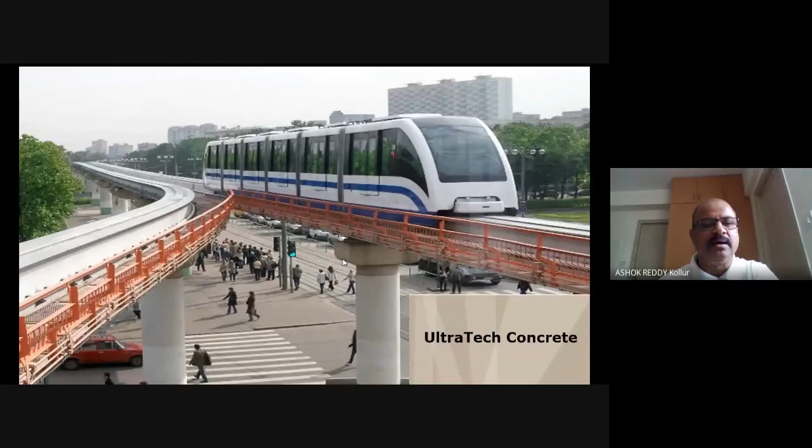For all major metros, railways, and bridges, we are supplying Ultratech cement. We have more than 100 ready mix concrete plants in 35 cities across India. India's first concrete to meet the requirements of Leadership in Energy and Environmental Design and other green building rating systems, as recognized by the Indian Green Building Council. We are the first commercial RMC company in India to adopt concrete recycling technology.

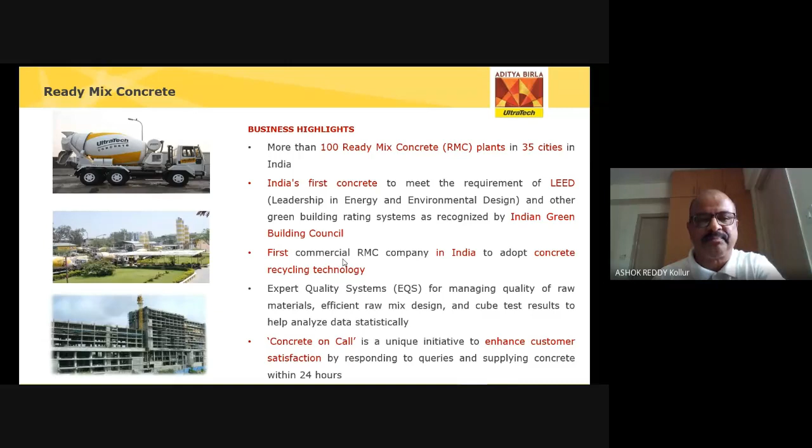We manufacture with expert quality systems, and have Concrete on Call services, with many things available. Our ready-mix concrete brands portfolio includes Ultratech cement, Ultratech concrete, Ultratech staple concretes, free flow concrete, plus concrete, pervious concrete, and fiber concrete. Many types of concrete are produced as per the requirement of the customer.

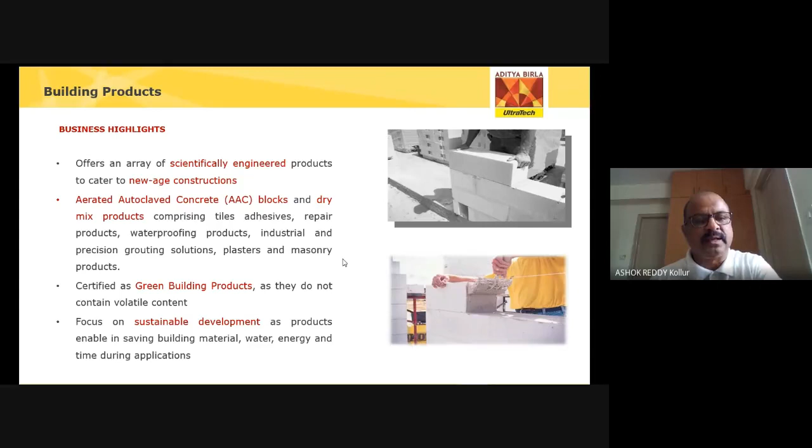Our building product division offers various scientifically engineered products, new age construction materials, lightweight blocks, green building products, and sustainable development products. Under building product division, we have Power Grout for grouting activity, and Super Stucco, which is a putty fixo block material, used to fix the blocks in between, just like mortar.

We have extra light blocks and lightweight blocks, Ready Plast, Seal and Dry for waterproofing solutions, Crack Fill, Base Coat, and Tile Fixo. Many building products are available at Ultratech, all under one roof, called UBS solutions. So any customer or engineer who comes to our stall should get all the items. My sound is clear, right, sir?

Hello. Okay, yes sir, sound is clear sir. Everything is clear, sir. In case if there's any intervention or trouble, I'll inform you sir. Okay fine, sir, fine sir.

So Ultratech Building Solution is a one-stop shop, so any customer or engineer entering our shop should get all the building material. That's what we plan. So any customer enters our shop, whatever from foundation to finish, all materials will be available at our shop. Across India we have more than 2,000 such shops. We are expanding into rural locations also.

This is how exactly the building solution shops look like. We have paints, we have steel, we have waterproofing items, many items. It started in 2013, first large format outlet in Bangalore, and across India we have started these building solution shops.

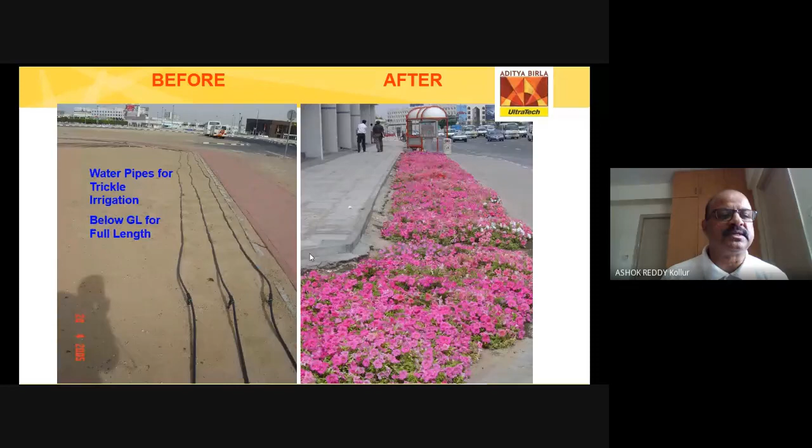It is almost 2,700 feet. How exactly does this look? I have the opportunity to visit this building. It is a marvelous building. We can go up to the 123rd floor. You can see from the 123rd floor, all of Dubai. Buildings look like very small things, and vehicles look like tiny vehicles going on the roads. So how exactly does Dubai look like?

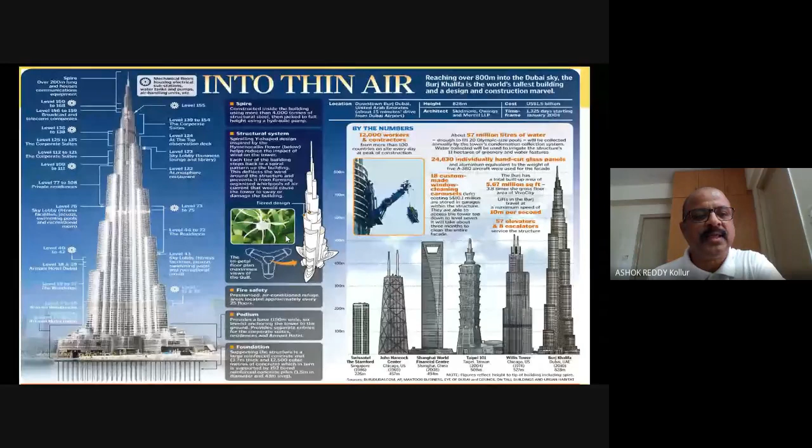Level 73 has very different stages. This building was completed in 2010, opened on 4th January 2010, with 1.5 billion US dollars in expenditure. Height is 828 meters, so 2,717 feet. Just imagine, 163 floors are there.

You can see on the side the other building, which was the topmost earlier, but now it has been crossed. This is what a marvelous building—each one of us has to see this.

The structural system resists the wind. Tall buildings usually have to resist large wind forces. The Y-shaped structure of the Burj Khalifa reduces the wind forces on the building. Y-shaped plans keep the structure simple and help in faster construction. This is what the design they have made.

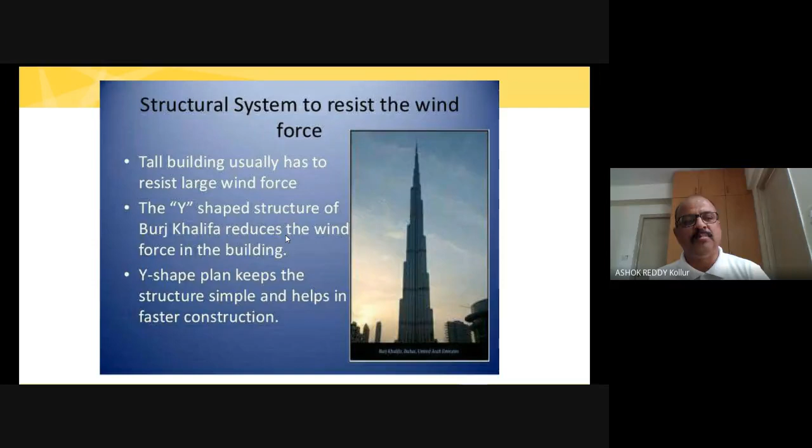So I had the opportunity to visit this building at the 123rd floor. I was able to see the buildings below. Because at that level there is a balcony wherein you can roam and see how exactly Dubai looks, up to 90 kilometers you can see from this place. Very wonderful experience when you go to that level.

Friends, why is this known as Burj Khalifa? It is named after Sheikh Khalifa bin Zayed Al Nahyan, the president of the United Arab Emirates and the ruler of the neighboring Emirate of Abu Dhabi. Earlier, initially when it started, they called it by another name—Burj Dubai. Now they call it Burj Khalifa.

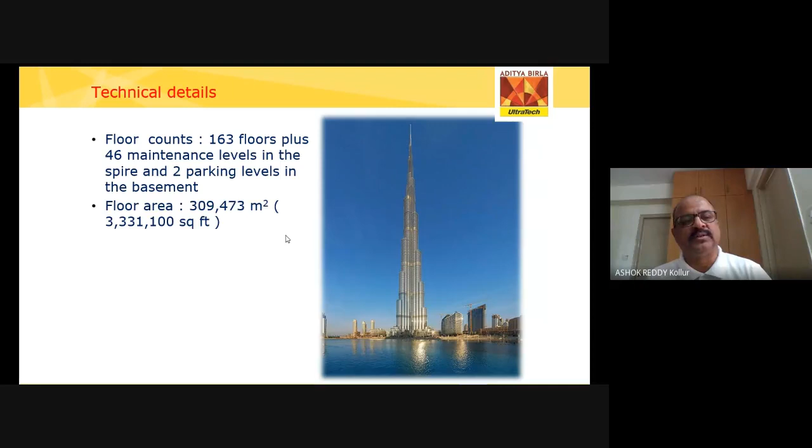So 163 floors, 46 maintenance levels in the spire, 2 parking levels in the basement, floor area of 3,09,473 square meters. That is 33 lakh 31,100 square feet. Just imagine the space—3,09,473 square meters this building has. It is a wonderful experience.

Burj Khalifa can accommodate 35,000 people at any one time. A total of 57 elevators and 8 escalators are installed. The elevators have a capacity of 12 to 14 people per cabin.

The fastest rising and descending speed is 10 meters per second, 33 feet per second. Within 1 second, you can go to the third floor, three and a half floors for a double deck elevator. The double deck elevators are equipped with entertainment, so people should not get bored when they're traveling—features such as LCD displays.

The building has almost 2,909, nearly 3,000 stairs from the ground to the 160th floor. After that, there are no stairs. So up to the 160th floor, 3,000 stairs are installed.

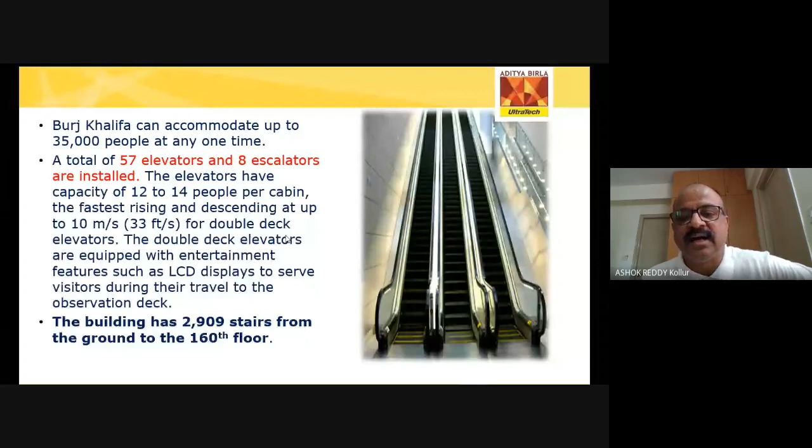These are the people behind this construction: architect Adrian Smith, structural engineer Bill Baker, and Samsung Engineering and Construction company of South Korea, which also worked on the Petronas Twin Towers and Taipei 101. Samsung Engineering and Construction built the tower in a joint venture with Besix from Belgium and Arabtec from UAE construction company. More than 80 countries' workers, engineers, and builders participated in this marvelous construction, which is a monument in the world today.

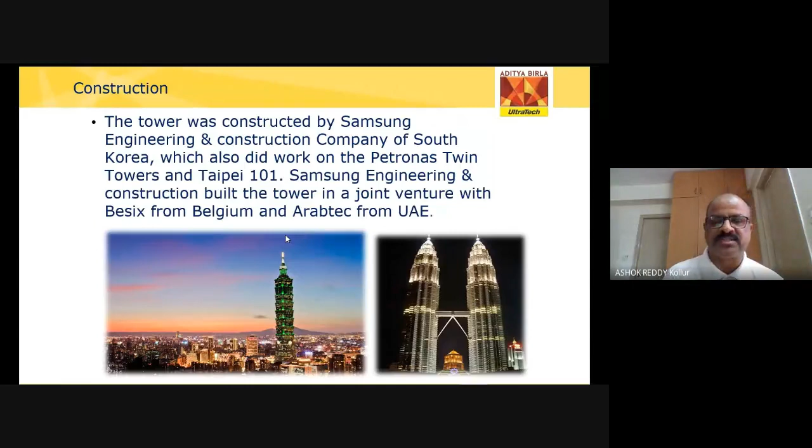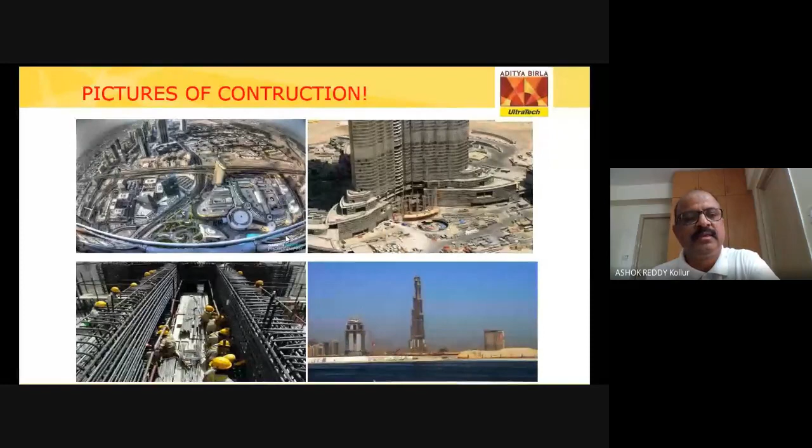So this is exactly what it looked like at the time of construction, from the top. You can see the bottom level, the columns, how they have been installed, how exactly it looked at the time of construction. You can see the top side, how we can see from the top of the building. While going on the stairs, you can see the LCD so that people should not get bored. This is how we can go inside and see the pictures.

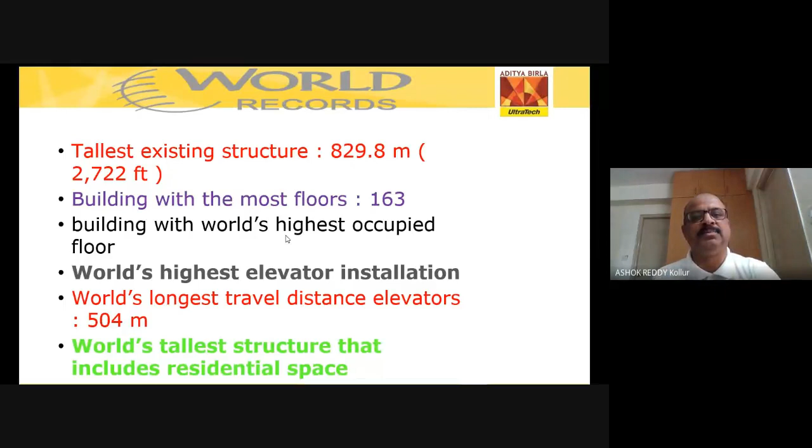Inside the Burj Khalifa, tallest existing structure today, holds some world records: building with most floors, building with the world's highest occupied floor, world's highest elevator installed, world's longest travel distance elevator, and world's tallest structure that includes residential space. These are some of the records still held today by the Burj Khalifa.

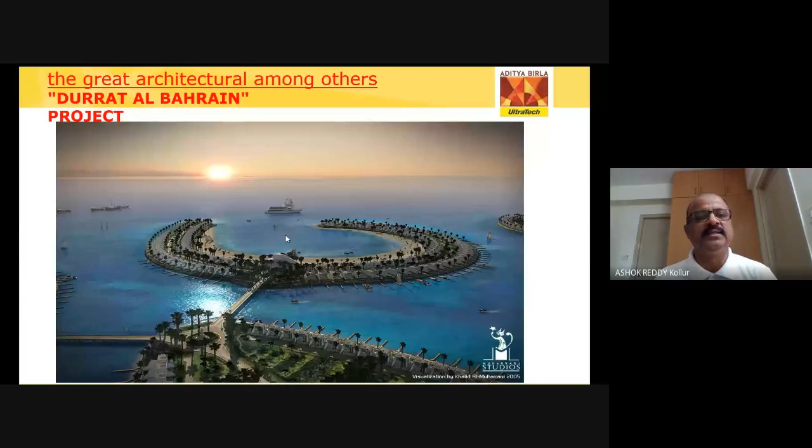Why is it called an island? Because there is a shortage of space, they reclaimed the sea by filling it with boulders and sand. They made these colonies on the sea so that each house has a sea face. The entire sea area was filled with sand and boulders, and they made a foundation. They developed a palm tree design so that every house has a sea face, connected with small bridges. Because of the shortage of land, they took the sea and built these palm tree design houses and colonies.

So you can go and stay for 1 day, 2 days. After your marriage, you can go there for your honeymoon. It is one of the best places to stay.

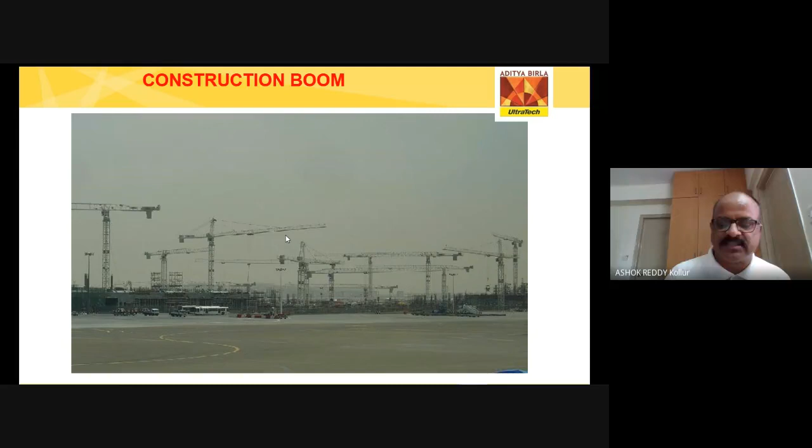So how exactly does construction take place? In Dubai, it's 1 week per floor. Wherever you go, you can see only cranes and cranes and cranes. As per one assumption, almost 20 to 25% of the cranes working are in Dubai or UAE—as of now it may have reduced. About 10-15 years back, huge construction was taking place. The condition for any contractor or builder is that they should build 1 floor per week—that is the strict criteria, and monitoring and quality are still maintained.

It is estimated that 1/4 of all the tower cranes in the world are in UAE. The current worth of construction works in Dubai is more than $20 billion US. Did you know that all water consumed in the UAE is obtained from desalination, since there is no fresh water available?

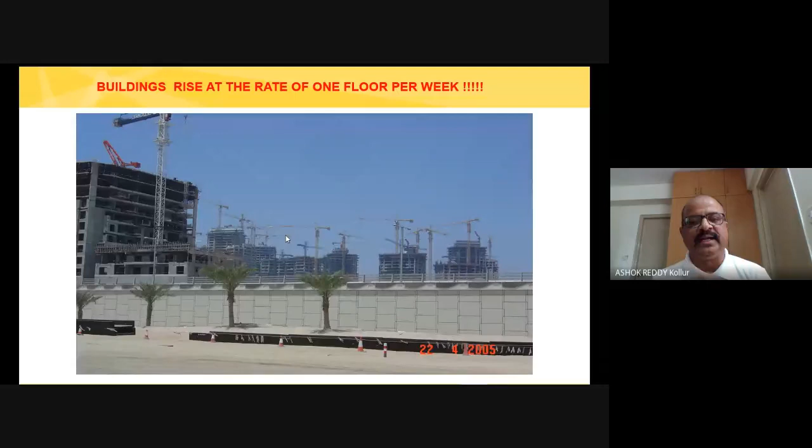Buildings rise at the rate of 1 floor per week—this is the minimum. In this small photo, you can see more than 50 cranes at different levels; day and night they work because the target is so significant. That is the reason they were able to build the Burj Khalifa in a span of only 4 to 4.5 years, which is very difficult.

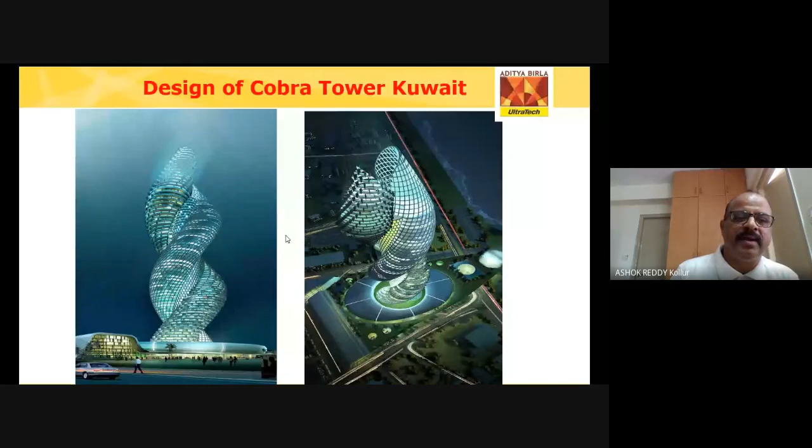Another building you have to see is in Kuwait. This is the design of Cobra Towers. Our Infosys office in Kuwait is in the same building. This is one of the wonderful structures—I don't know how they designed the shear force, bending moment, and eccentricity. This is the biggest challenge engineers have designed. This is what we as civil engineers are proud of. Such designs we have made, able to sustain. These are marvelous buildings on earth.

So now after Dubai, I am going back to the first chapter about our company. Second, after Dubai, now we go to challenges and opportunities in civil engineering. Sir, how much time do I have, sir?

Sir, now it's 12:10. Yes, I am sure the students are really looking forward to this. Maybe, sir, I leave it to you. At 1 o'clock we have another webinar coming up, so probably if you can continue for another 20 minutes or so, but I leave it to you, sir. We are honored to have the students here, but I'm sure after you're done, students may be interested to ask you questions also, which will be more fruitful, I believe. So I leave it to you, sir, please continue. Please, 20-25 minutes I'll complete, sir.

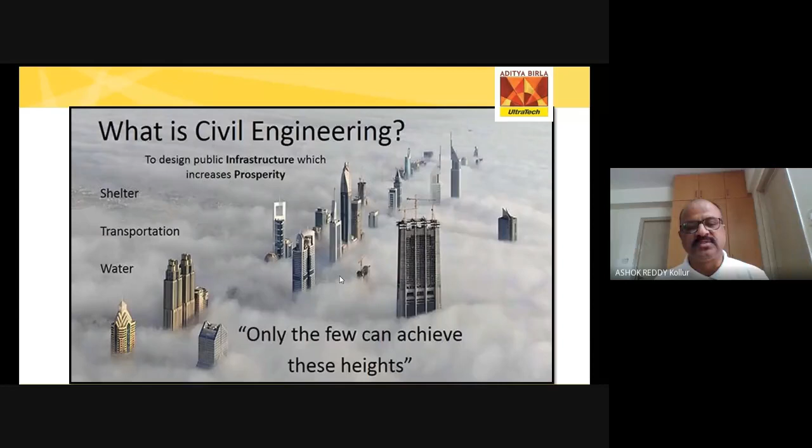What is civil engineering? We have already seen Dubai; only a few can achieve this. Engineering is the toughest subject, the toughest thing. Everyone, all over the world, has quoted this. This is what we are proud of, that we can only reach the sky, and no one can guarantee where we can reach. That is what civil engineering is: shelter, transportation, water, whatever we see on earth, it is because of civil engineering. So friends, we should all be proud of us.

A quake bigger than the Nepal 2015 earthquake may hit northern India soon, research shows. So we should be well equipped to build buildings that can sustain an earthquake of magnitude 7 or 8. At least we can design a building in such a way that people have sufficient time to come out of the building, even if an earthquake of magnitude 8 and above happens. That is the need of the hour, the new challenge posed to all civil engineers.

Civil engineering is a people-serving profession, meeting society's needs, providing service to mankind. We are not just earning; we are serving society's needs, providing one of engineering's most rewarding careers. So we all choose this excellent, rewarding career. We are doing this for society, we are growing the society, we are modernly building the society.

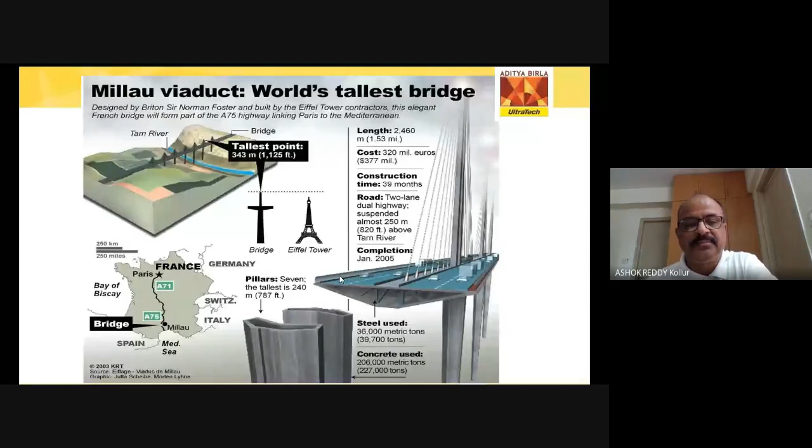You know this bridge is bigger than the Eiffel Tower. The length is 2,460 meters. The cost is 320 million euros. Construction took 39 months. The highway is almost 250 meters above the Tarn River. Completion in 2005. Steel used is 36,000 metric tons, and so on. This is the marvelous structure built, and this is how it looks after completion.

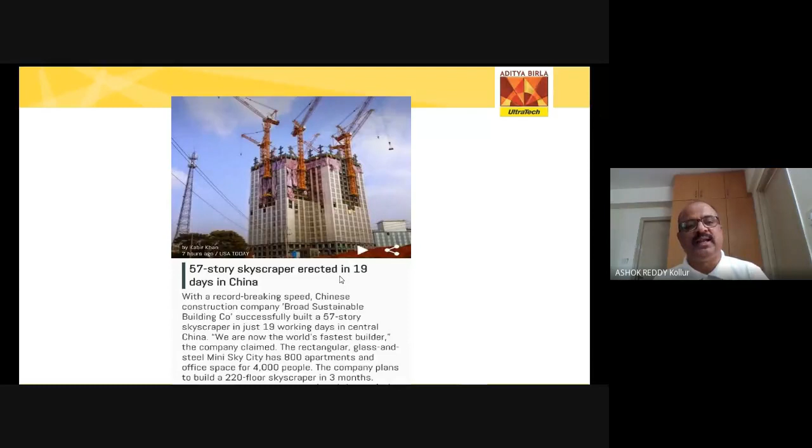You may know recently it appeared in the news: a 57-story skyscraper erected in 19 days in China. Even in Punjab, a building was also built in 48 hours. These are new technologies, new innovations, new materials, new methods that made this possible. China had to erect a 57-story skyscraper in just 19 days.

Even the government of India has planned something. This appeared in the paper in 2017. Union Minister Nitin Gadkari said his ministry is planning to construct a historic landmark bigger than Burj Khalifa in Mumbai, and a green smart road 3 times bigger than Marine Drive. The plans are ready and awaiting the center's note, that's what he said. So definitely we are also moving at a faster pace.

A lot of new technology, new buildings, bigger buildings are coming in India too, along with a lot of highways. Today it's a competition. China is almost at completion stage for a building of 1.25 kilometers. Just imagine, Burj Khalifa is 800 meters, and this one is 1.2 kilometers, over 400 meters more, about to be completed.

So friends, in Beijing, you can pay someone $60 to come and rescue you from a traffic jam. They pick you up on a motorbike and someone else will drive your vehicle. You may have heard in the news that traffic jams in China, Beijing, Shanghai can last 1 week, 48 hours, 60 hours. So some people will come and rescue you on a two-wheeler by the side, and your driver will bring your vehicle after 3 days, 4 days, whatever. So that is the challenge, what can we do about this.

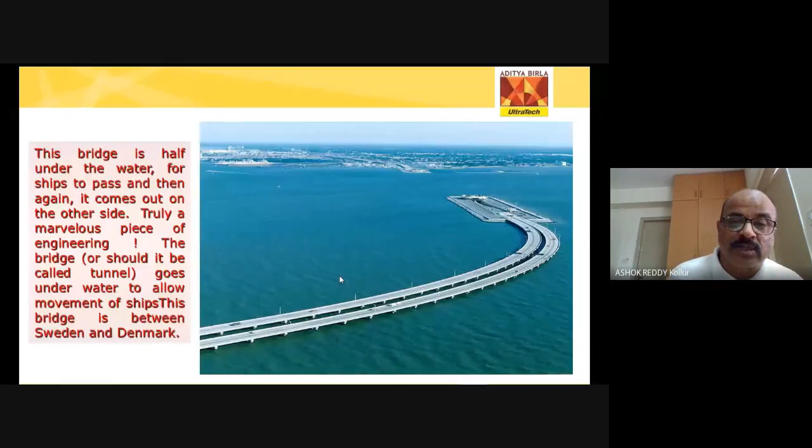But we can go further or better. You see how exactly that tunnel goes below the sea - you are traveling below sea level. You see, right side is above the sea, left side is below the sea. So comfortably they have made it to travel - you never think that you are below the sea. So the lighting, the smoothness, the design, the comfort of driving, they have engineered well. This is what civil engineers have done, and we are all proud of that.

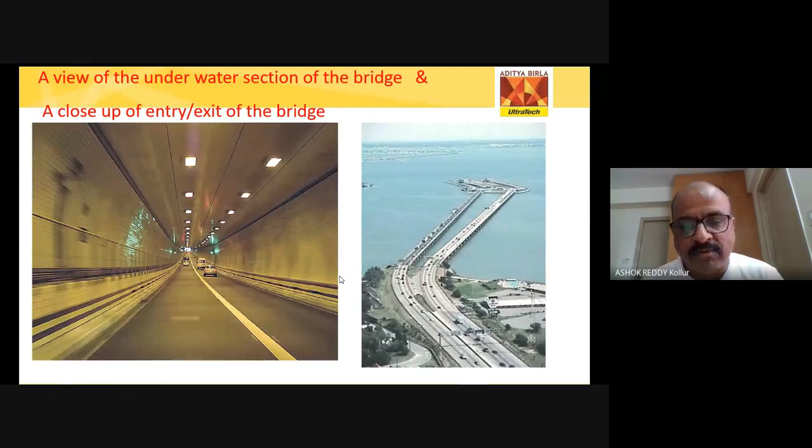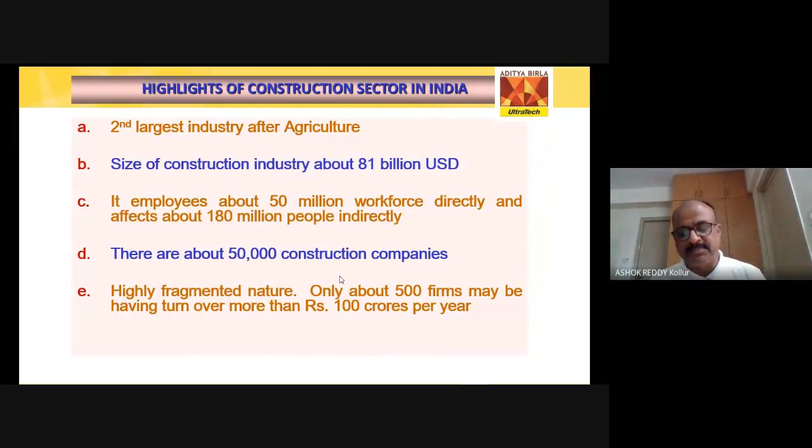So friends, civil engineering is one of the biggest industries, the second largest industry after agriculture. It is a huge, $81 billion US industry - this is the construction industry. It employs 50 million workforce directly, affects 180 million people. There are 50,000 construction companies, but however only 500 firms have a turnover of 100 crores. This is the biggest industry. So for a civil engineer, you will get a job, but you should have some skills, some soft skills. So exactly, it is fragmented.

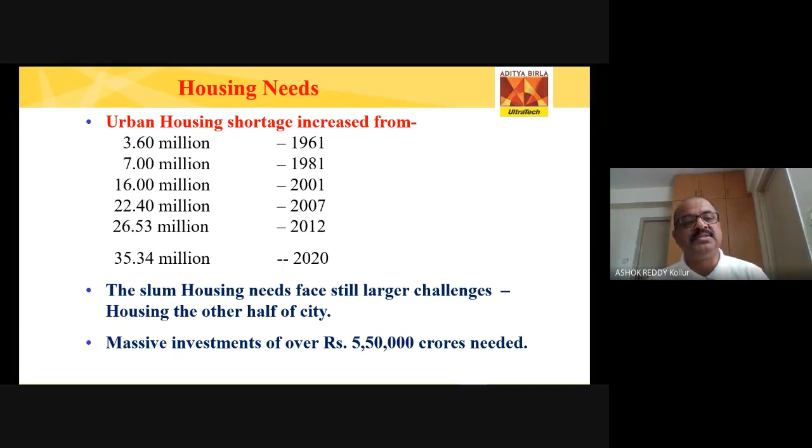Another reason is that literacy is increasing. In 1950, India's literacy rate was 17%. Today it is almost 90%. Maybe some states may have less or more, but overall I can say it is between 85 to 90%. So people are getting educated and economically improving.

So they need housing, better facilities, and better education facilities. People are getting more money. Today we are the highest English speaking population on earth. So whatever English we speak now, that should be considered correct English, because the highest number of English speaking people, around 300 million Indians, speak it.

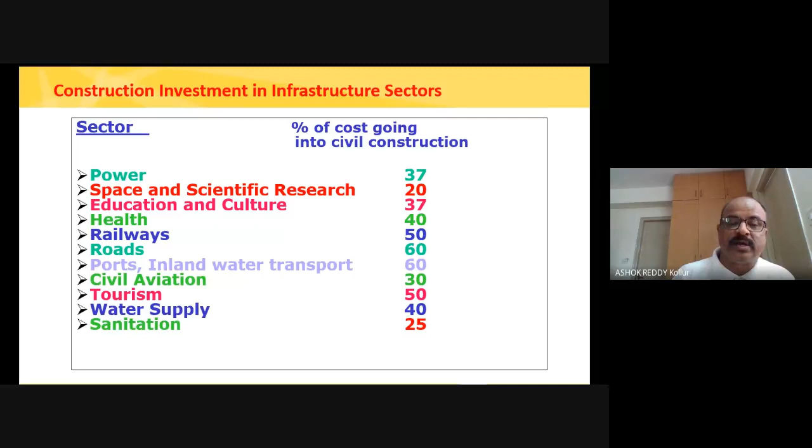So they need engineers. You can try in civil aviation, tourism, water supply, railways, roads. Railways also have the highest number of civil engineering opportunities - a lot of bridges, lot of new tunnels they are building, lot of new technology railways are bringing. Bridges are among the marvelous ones they have built recently, even older bridges from the time of the British.

Friends, other than engineering, you should also have some different skills. Engineering is okay, but 80-85% of your financial success is due to your personality and ability to communicate, negotiate, and lead. Shockingly, only a small part is due to technical knowledge.

What you spend 20 years learning in engineering may be contributing only 15-20%. Your soft skills like communication, public speaking, negotiation skills, leadership skills, and behavior skills will definitely fetch more chances for getting a better job.

So friends, other than engineering, you should also think about soft skills, higher education, behavioral skills, presentation skills, communication skills, leadership skills. You can take some short-term courses. This is a need of today, because when you go to the government, they may see certificates and other things, but when you go to private companies, they will exactly look at how you present yourself, how your personality is, your ability to communicate, how you negotiate, and what leadership skills you have.

These also play a most important role in your professional career, personal career, and when you go for jobs and so on.

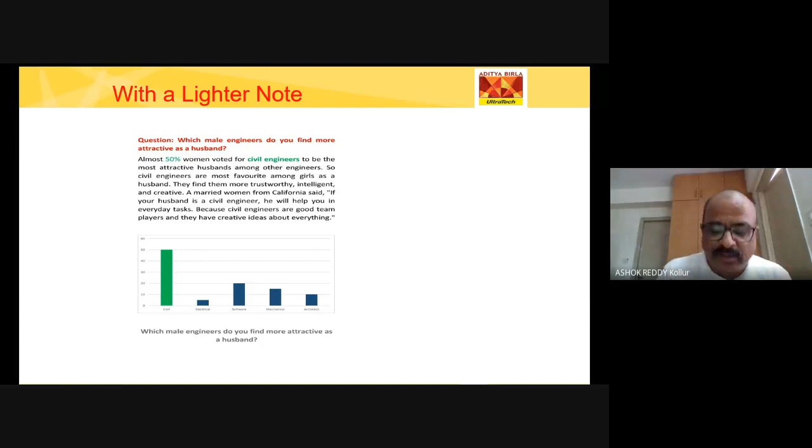So in conclusion: roofs help us survive, and we build it. We build it - no hardware, no software without a proper roof. When a civil engineer rests, the world rests. If x-axis is mechanical, y-axis is electronics, z-axis is electrical, then civil engineer is the origin. Civil forever, civil rules, civil rocks. Proud to be a civil engineer.